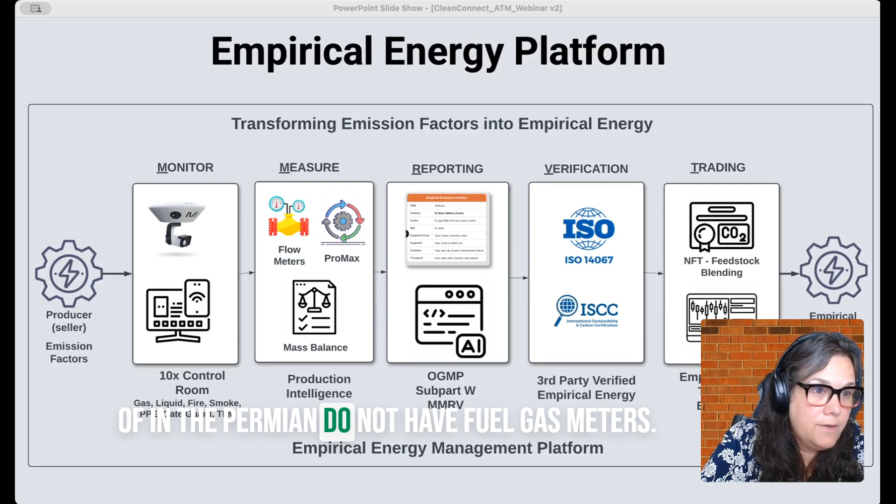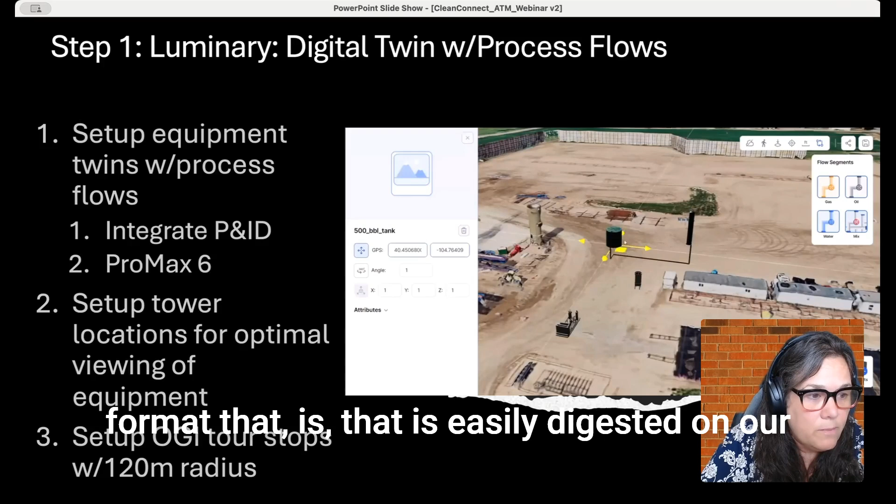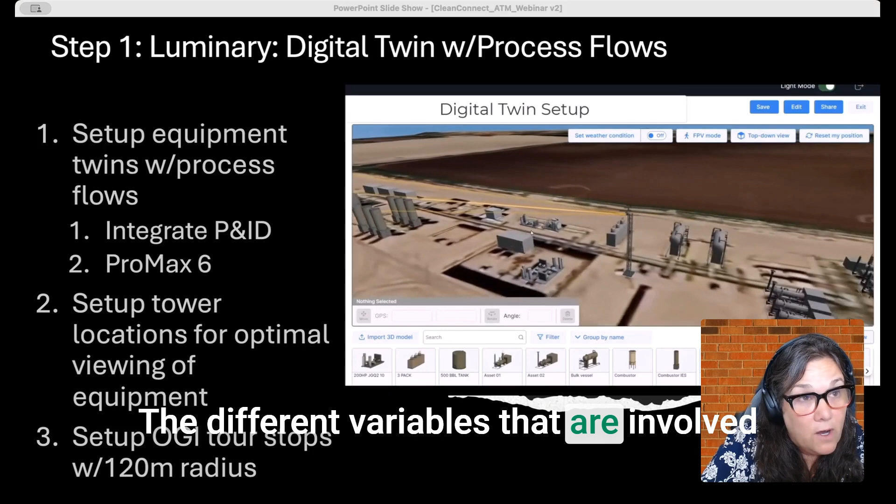Historically, many of the operators that I know in the Permian do not have fuel gas meters. So we have discussions with the SMEs on what's another way of quantifying that. And so we go through those one by one, whether it be from data, like how do we quickly access their data and getting it in a format that is easily digested on our part, and helping them with that, or all the way to the point of looking at the mass balance and the different variables that are involved within the ProMax simulation of the facility.

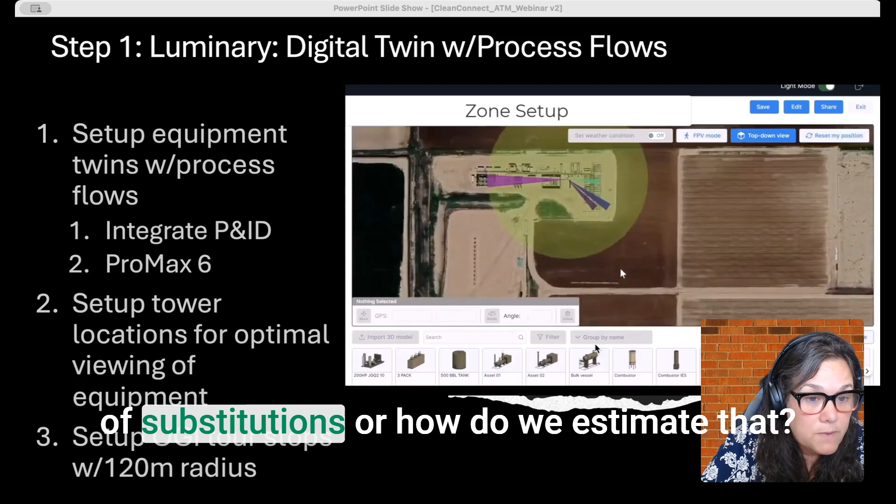And if there is a missing critical device, like in terms of fuel gas, then what sorts of substitutions, or how do we estimate that? And it's working with each client and their SMEs on setting that up and figuring out, do we use ProMax? Do we write a different calculation? Do you want to put in a temporary meter? Do you want to go out and do some other testing? And so it's walking through one by one, and then once we have that whole plan in place, it's just implementing it, and it's all automated from there.

And I think that's one of the things, going back to talking about the overall platform, the fact that you figure out mass balance and look at the meters and all that in and of itself. But we also have this camera sitting out there in many cases where it's another, if you will, meter that's out there looking at something. And so, if you have a tank at overpressure, the camera detects it, it starts to try its own measurement, but then to be able to reconcile that against a mass balance loss or against other calculations is a unique combo of the measure and manage.

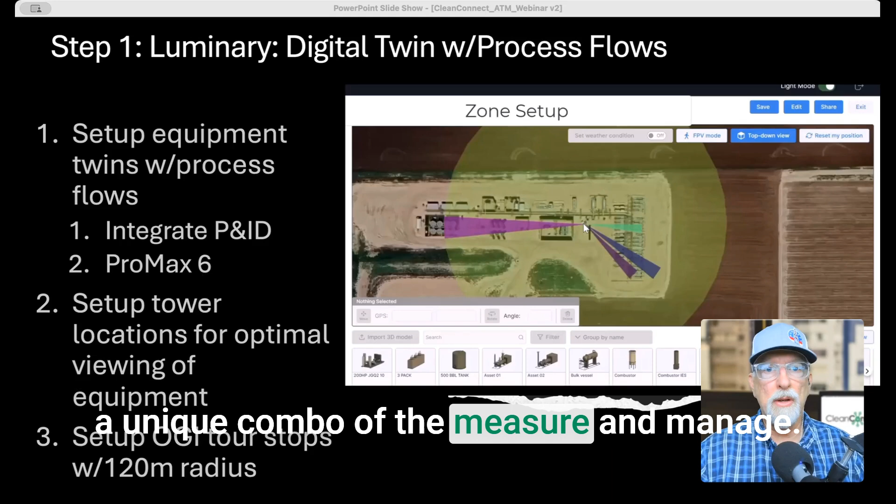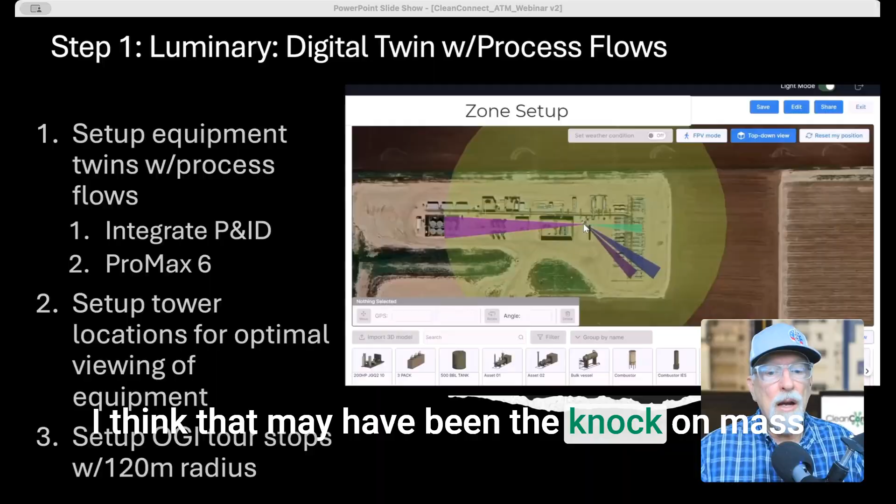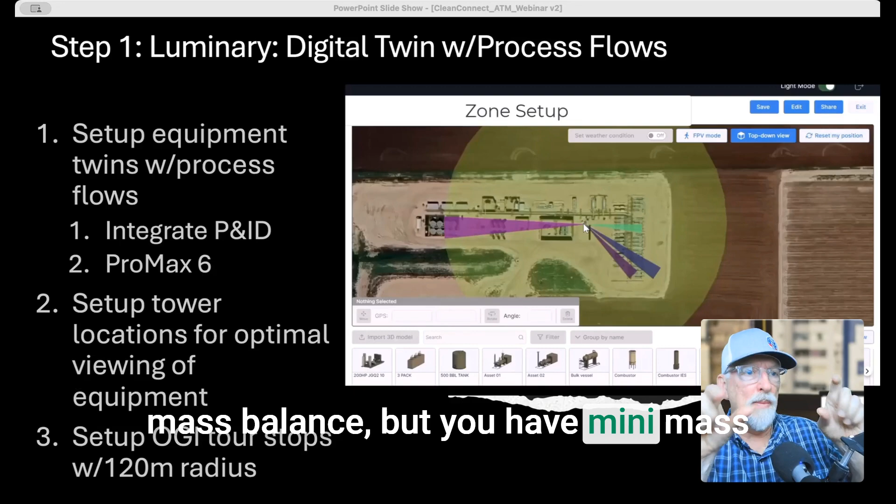And I'll pull that out just to show that. Again, monitoring here and then measuring here. We can use both of these things to help with the calculations. I think that may have been the knock on mass balance in the past, where they said, wait a second, you're detecting this mass balance loss, but you don't know where it is, right? Now, that may not be entirely true, because you said you've got this overall mass balance, but you have mini mass balances within that overall closed system.

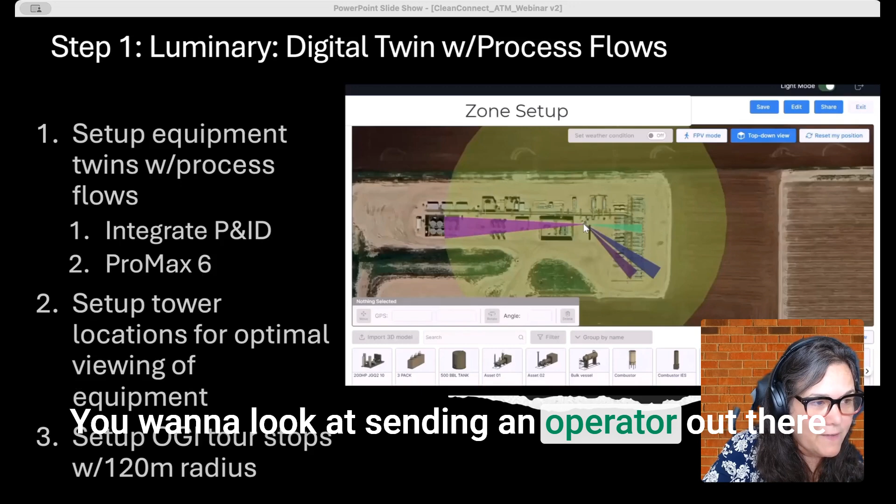Is that true? Yes. And so what's good too about having that integrated with Luminary is you can see from the camera the specific device that's emitting. So then that would allow further investigation on how you want to quantify that. You want to use the machine learning model that does the quantification. You want to look at sending an operator out there that uses a calibrated bag to try to capture that emitting device if it was emitting continuously.

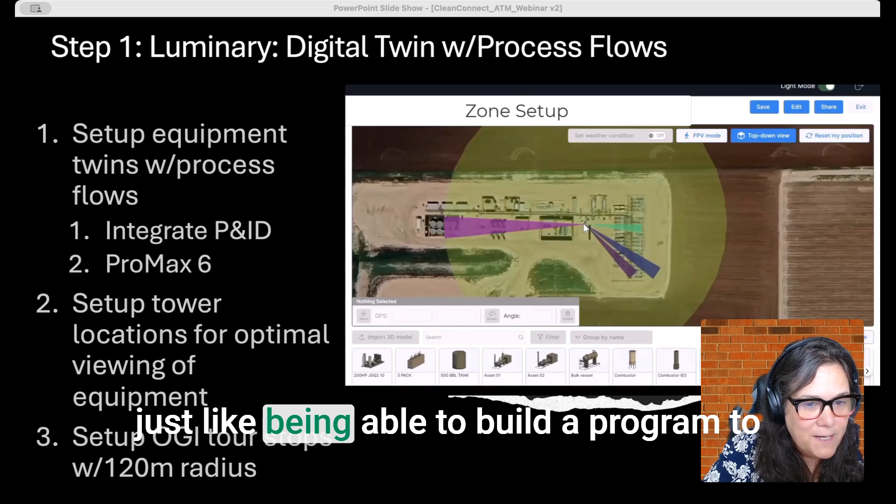Things like that offer more flexibility for the operator to get down to the specifics about what device is emitting, and even just being able to build a program to track, is there a continuous problem with a specific device that keeps on emitting, to start studying that even more in depth.